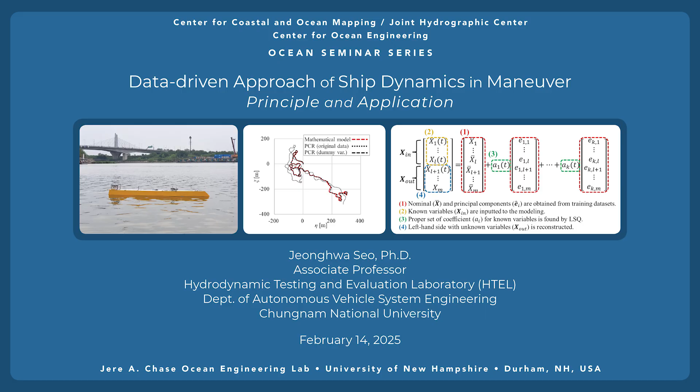So we have an excellent guest speaker today, Professor Jeonghwa. So he is actually going to be here this entire year until December-ish? January? Okay, so he's here at UNH. He's a visiting scientist.

His background: he completed his Ph.D. in naval architecture and ocean engineering, something very relevant to most of us here, in 2016 at Seoul National University in Korea. He did a lot of cool experimental fluid mechanics work then, which we're hoping he will get to do some again while he's here.

He was a postdoc for 2 years and then joined the Department of Naval Architecture and Ocean Engineering at Chungnam National University, which has since been renamed to the Department of Autonomous Vehicle System Engineering. And his research focuses on the design and analysis of towing tank models in naval tests and analyzing operational data with real fleets. So as you're watching his talk, think about the fact that we have this great well of knowledge who will be here for a year.

And again, thank you for giving this talk. We also ambushed him midweek this week and said, would you be willing to give a talk? So 2 days notice, so we are very, very appreciative, very happy to have him here. So take it away. Okay.

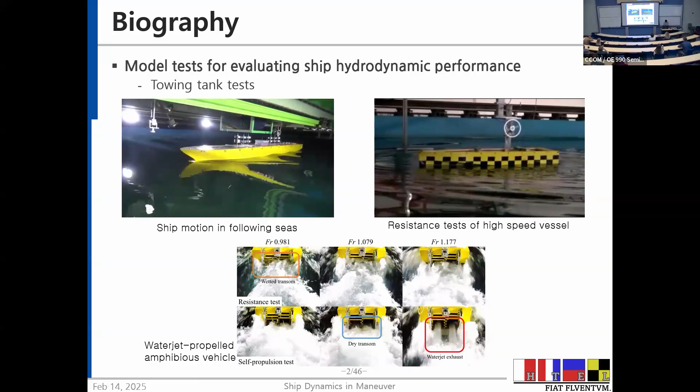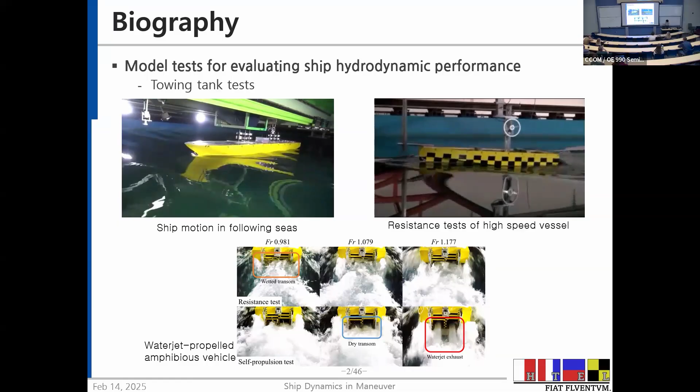Okay. So after towing tank experiments, I focused on flow visualization tests. So all the figures are experimentally acquired, not CFD. Stereo PIV measurement of the propeller wake field, and the wave height field was measured by depth camera around one cylinder in regular waves. And this is my PhD thesis. Here's one body.

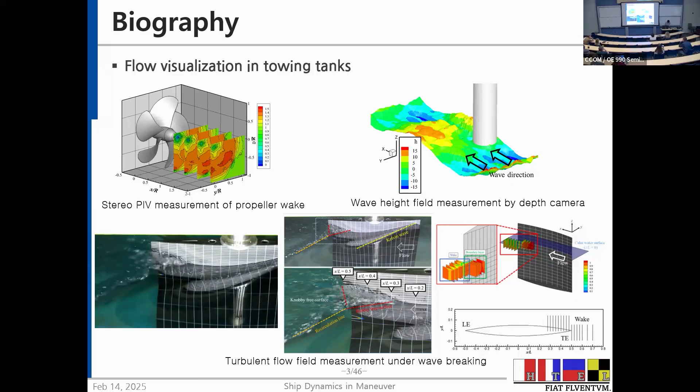And there's one wave pattern and wave breaking. So I measured the flow structure behind, underneath the wave break region by stereo PIV system and made some turbulence structure analysis like that.

And after that, when I moved to my present university, there's no towing tank, so I needed to find another place for experiments. It was outdoor condition, so we made some test models. We call them free-running models, so we can radio control them or make some autonomous operation. So this is an amphibious vehicle model, and this is one surface combatant model.

So we made maneuver tests like this and acquired some data, and I'd like to make some dynamic system from the result. That's what I'm doing now. So I will introduce this kind of thing.

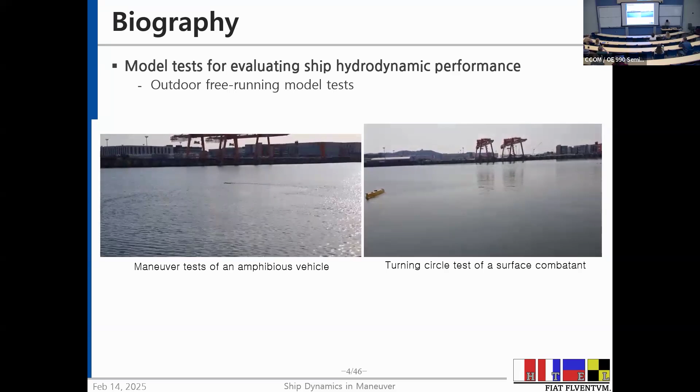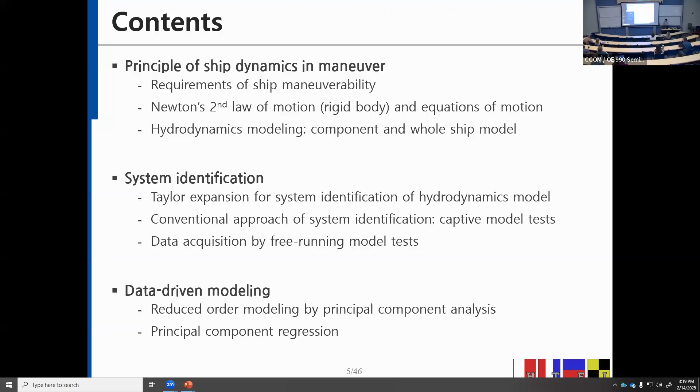Yes, actually this model ship cost about 50,000 as far as I remember, but I got two capsizes of the model ship in this place. It's very expensive and a very horrible experience in my life, because my supervisor got mad. I couldn't evacuate the ship by myself, so I hired one diver to get the model ship back, and I refurbished it, and I did the experiment.

Okay, so for the next 30 minutes, I will make a presentation about principles of ship dynamics in maneuver. Actually, maneuver is somewhat similar to control. So if you are familiar with control theory, then you can find that ship maneuver is a very low level of hydrodynamics or dynamics. And so here are some principles like ship maneuverability and Newton's second law, hydrodynamic modeling.

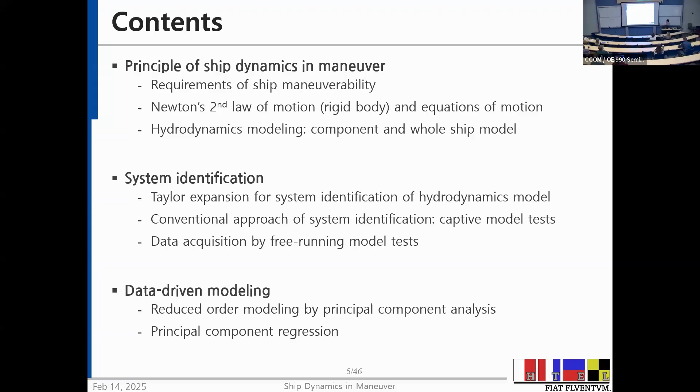And after that, if we got a model, or if we want to get the model, then we need system identification. So conventional and some contemporary ones are presented here, and data-driven modeling based on PCA or PCR is what I am doing now. So I will introduce this kind of thing.

Okay, so most of the audience are in mechanical or ocean engineering, so I can introduce what's going on in naval hydrodynamics or naval architecture, how they think. So the first characteristic is extrapolation. We don't care about the model scale things. We want to know what we cannot know. That means we do model tests and we extrapolate to full scale dynamics or full scale hydrodynamics from model tests.

And we are very conservative, I'm sure of that, and I can say that very proudly, because for all kinds of shipbuilding, the design failure cost is very high. That means even one collision of a ship or one design failure of a ship costs very highly. So we are very conservative, always worrying about new things.

And surely high Reynolds number for our cases, but compared to the field of oceanography or climate, our Reynolds number is relatively very low. Anyway, for me, it's high enough. And ship naval hydrodynamics concerns Froude scaling, focusing on wave-induced problems. Froude number basically deals with gravity-related phenomena. That's why we focus on Froude scaling.

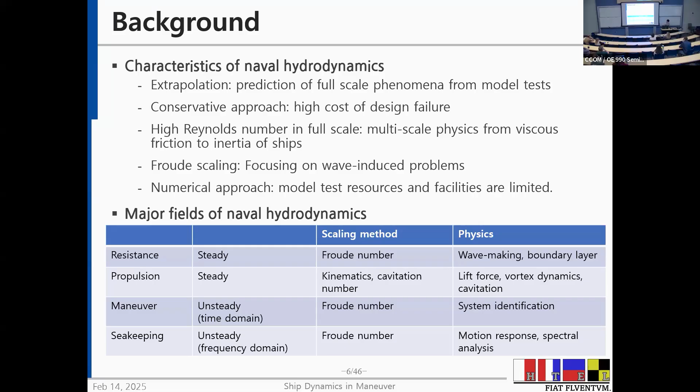So there are some major fields of naval hydrodynamics like resistance, propulsion, maneuver, and seakeeping. These days I am working in maneuver, but actually my major was in resistance. Okay, so based on ship resistance, I will introduce how ship hydrodynamicists think about this problem. So a ship suffers resistance when it's going through the water, and there's viscous resistance and wave-making resistance.

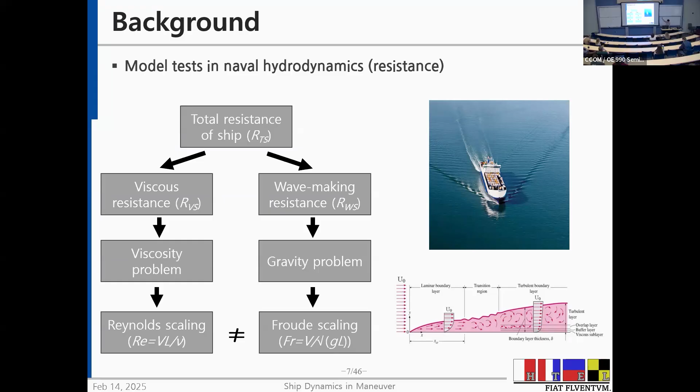Viscous resistance is about the boundary layer friction, so it's about Reynolds number scaling. And wave-making is about gravity, so Froude scaling is required. And if we design a model test, then we can make the Reynolds number and Froude number the same as the full scale ship. That's the basic principle of model testing.

But the problem is we do experiments in water, so the model speed cannot be the same whether we base it on Reynolds number scaling or Froude number scaling. So if we want to make the same Reynolds number as the ship, then the test model speed should be over Mach 1.5. It doesn't make sense.

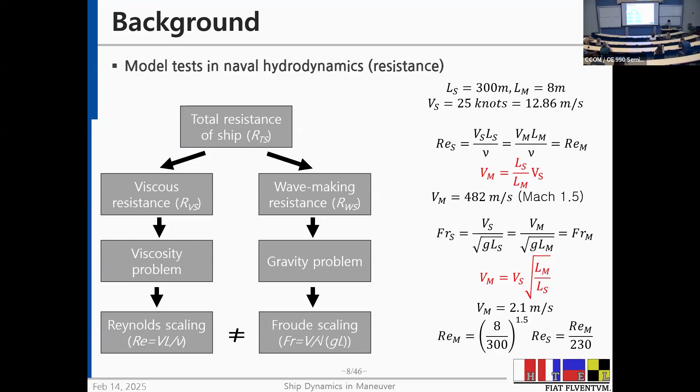So we make the same Froude number, then it's just 2.1 meters per second. Now we are somewhat happy with that. So we do experiments based on Froude number scaling. Surely there are other reasons, but this is the main one: we cannot make Reynolds number similarity in towing tank tests. Anyway, if we get the same Froude number, then Reynolds number is around 100 or 200 to 1, so Reynolds number is seriously reduced in the model scale.

Anyway, for a resistance test, model test, we do the model test at the same Froude number as the ship, and we measure the total resistance of the model ship with one load cell. Then we make the non-dimensionalization, and we need to divide viscous resistance and wave-making resistance. But how?

In 1957, there was one correlation line for Reynolds number and resistance coefficient for viscous resistance. Using this formula, we can compute this, and the rest is regarded as the wave-making resistance coefficient, which is a function of Froude number. So we can say this will be the same between model and full-scale ship. Then we can recalculate the viscous resistance coefficient at the ship's Reynolds number, and add them together to get the resistance of the ship.

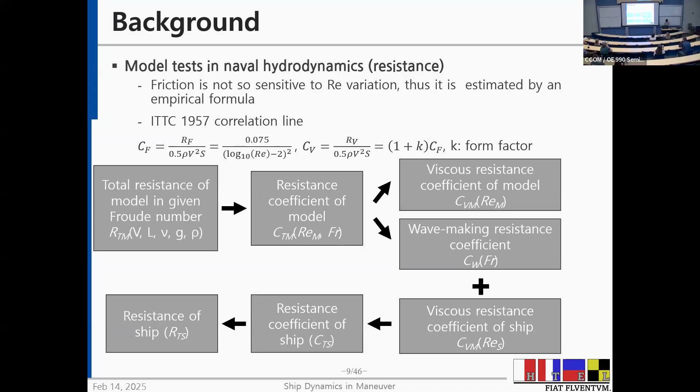So basically, we do the experiment based on Froude number, but there's a difference in Reynolds number. Fortunately, friction is not so sensitive to Reynolds number variation, so we just use these kinds of empirical formulas to treat the Reynolds number difference between model and ship. It's very common in naval hydrodynamics.

There are towing tanks around the world, and the towing tank community has made standardization or recommended guidelines for model tests, because this is a very conservative field. Everyone wants accurate experiments and accurate analysis, so there's no room for innovation, I think -- though I'm young in this field as well.

Anyway, ITTC usually holds their conference every 3 years. In the US, as far as I remember, University of Iowa and University of Michigan are members of ITTC because they have towing tanks similar to this one. But anyway, they are naval architects, so the naval architecture community runs this kind of thing.

Very long introduction, but now I will talk about ship maneuverability. Basically, ship maneuver is achieved by rudder control. The rudder is usually located at the end of the ship, which we call the stern. The stern propeller's accelerated flow makes flow go through the rudder to create additional lift force.

You may know about the steering wheel of very old ships -- it actually works like this. You turn the wheel, and then a lever, which we call a tiller, is moved to make the rudder deflect. It's all the same even in modern ships, just with a hydraulic system to turn the rudder so you can turn the ship.

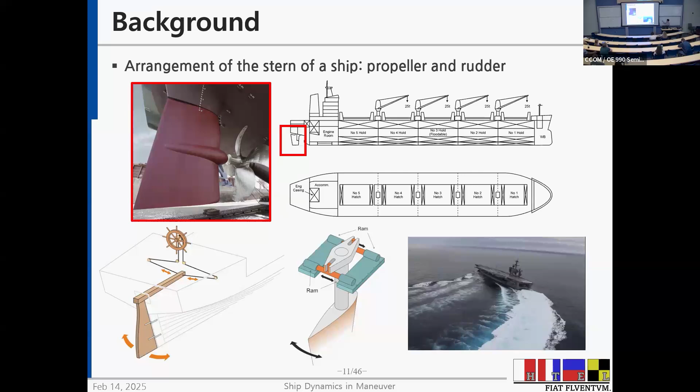This is a more detailed explanation of ship dynamics during maneuver. As I said, we control the rudder to maneuver the ship, but the rudder only initiates the motion. At first, we turn the rudder and the ship starts to move, but when the ship begins to turn or enter yaw motion, the hull itself suffers a Munk moment that maintains the turning. So usually the rudder just initiates, but after that, ship motion is dominated by the hull itself, not the rudder. Sometimes when the ship is turning, we deflect the rudder again, but it never responds because the ship's dynamics is already dominated by the hull.

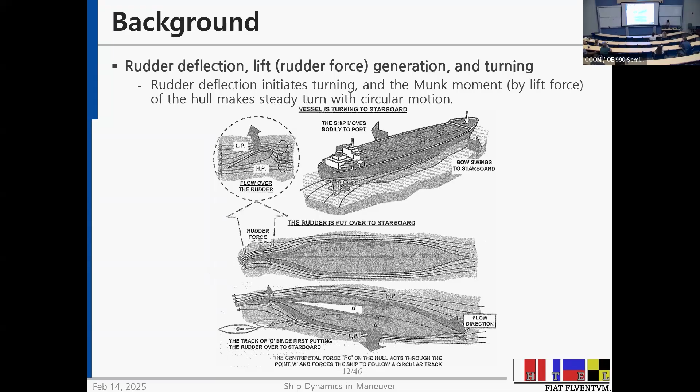For ship design, the ship needs to be stable enough to keep its course against external disturbance -- that's the main requirement for shipbuilders, called course-keeping ability. In addition, the ship should be unstable enough to change course easily with rudder control, meaning it should change heading easily when wanted, but go straight when not. These are conflicting requirements. To deal with them, we need a larger rudder.

If the rudder is large, we can satisfy both requirements. But ship owners don't like that because it increases the building cost of the ship, and sometimes causes additional drag or difficulties in stern arrangement. So for naval architects, designing the rudder is always a kind of conflict and compromise.

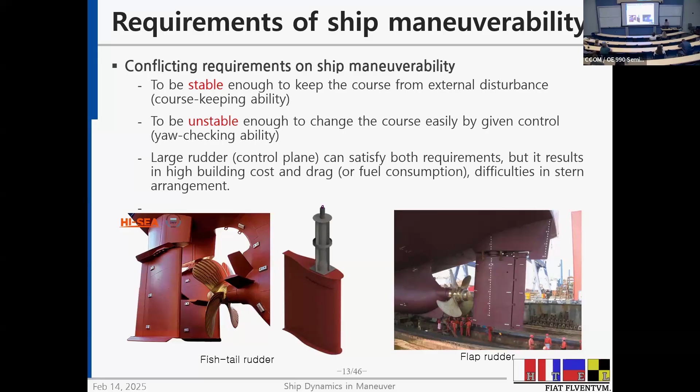Ship maneuverability is important. IMO, the International Maritime Organization, rules criteria of ship maneuverability. So if you make a registered ship, you need to do a maneuverability test after you build the ship and before registering it. It should pass the maneuverability exam for criteria.

There are some tests like turning circle test, just making a circular turn, and zigzag test. These two are very important. And if the ship has some difficulties in hysteresis at small yaw rate, then we do an additional spiral test like this, making a big turn with rudder deflection getting larger and larger to make some spiral.

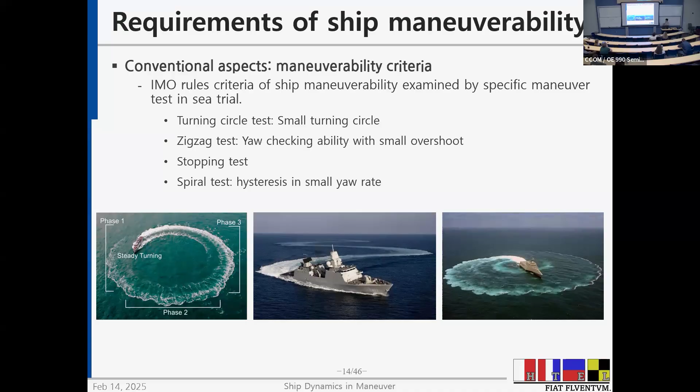But ship maneuverability is tested after the ship is made, and ships cost very high, so we need to predict it at the design stage. Ship maneuverability must be accurately predicted before sea trial. If the ship is in sea trial and it's proven that it does not satisfy these criteria, then ship owners may refuse the ship to be delivered, which is a total loss for the shipbuilders. So shipbuilders like to predict all the maneuverability even before the ship exists.

But full-scale experiment or full-scale CFD is practically impossible. Some may try, but because of high Reynolds number, we need to know about the viscous friction of the ship, so it's a very wide multi-scale problem. It's practically impossible in the very urgent ship designing process. Sometimes we need 2 or 3 weeks for getting hydrodynamic performance, but full-scale CFD may not meet the requirements.

Extrapolation from model tests is common, and prediction of time history of the ship is usually needed. So we do maneuver simulation using ship hydrodynamics modeling. That's what we do.

To explain maneuver simulation briefly, we use the equation of motion, F equals ma. If we have a hydrodynamic force model, it's just the estimation of force onto the ship based on current status like speed or rudder angle. Then we can estimate the force, and by integrating the force and resultant acceleration, we can make the time history and predict the time history of the ship. So this is ship maneuver simulation for us, and my task is to develop the hydrodynamic force model, because I cannot change the equation of motion. Maneuver simulation is done with the same methodology across researchers.

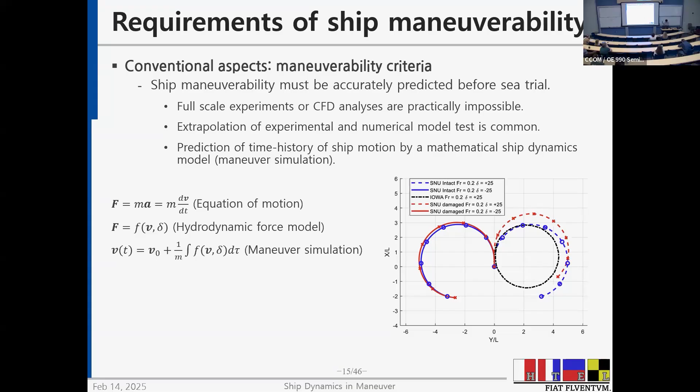So hydrodynamic force model is my main concern, and it was a conventional aspect. Usually naval architects focused on IMO criteria, and after that, nobody cares about it. Those very well-trained and experienced captains steer the ship, so it's all his responsibility. Once the ship passes IMO criteria, then nobody cares about the ship's maneuverability.

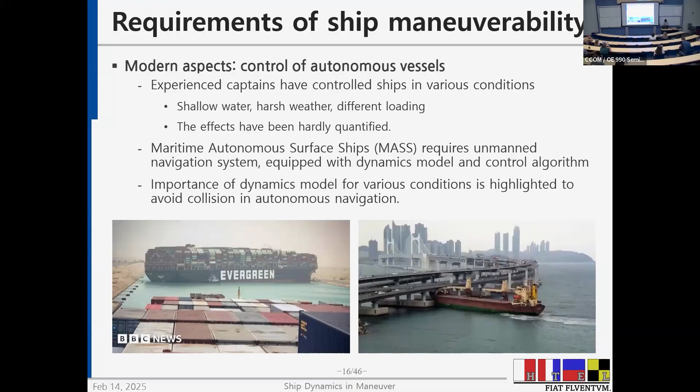But the world has changed for autonomous vessels, and an autonomous vessel steers by itself usually, getting its route and making rudder deflection to keep the route. But the ship hydrodynamics model should be very accurate and needs to reflect all kinds of external disturbances. Even very well-trained or very experienced captains make mistakes like this in maneuvering. But what happens if we make them autonomous? We are sure more collisions and accidents will occur temporarily. So better hydrodynamics modeling can predict these kinds of accidents and help make a better maritime world, I think.

Okay, long introduction again. I have just 50 more minutes, and I have 30 slides. Okay, I need to hurry. I'm getting tired.

So the objective of ship maneuverability is just prediction from model test. That's all. Let's keep that in mind.

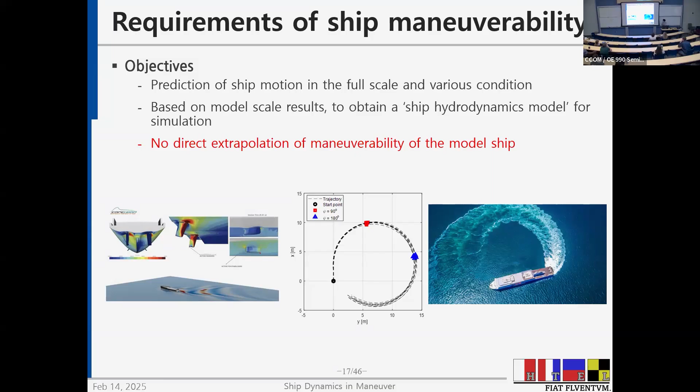You may know that there are 6 degrees of freedom, but for ship maneuver, we use 3 degrees of freedom motion on the water surface: surge, sway, yaw have been treated, but recently people like to include roll motion, because roll changes somewhat the yaw characteristic of the ship.

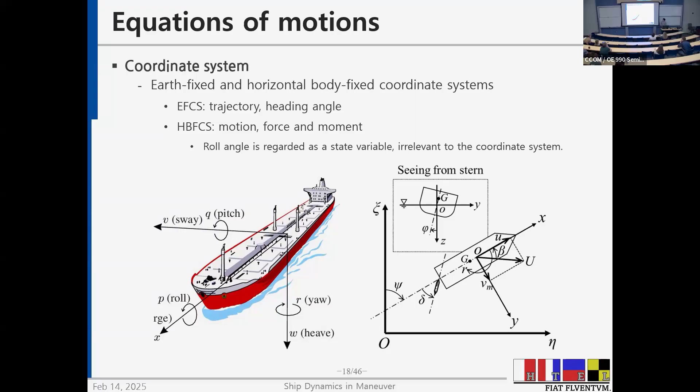We use 2 coordinate systems: Earth fixed, and horizontal body fixed, which is fixed on the water surface. So even if the ship has roll motion, the body fixed coordinate never tilts with it. We keep the body fixed coordinate system parallel to the water surface like this. So ship roll angle is just a kind of state variable, but it is irrelevant to the coordinate system change. That's a very important thing for ship hydrodynamics on the water surface.

And we have equations of motion. I will skip it. We need this left-hand side term for force and moment, and we need to model it. But there are three kinds of force: one proportional to acceleration, one about steady motion, and a hydrostatic one.

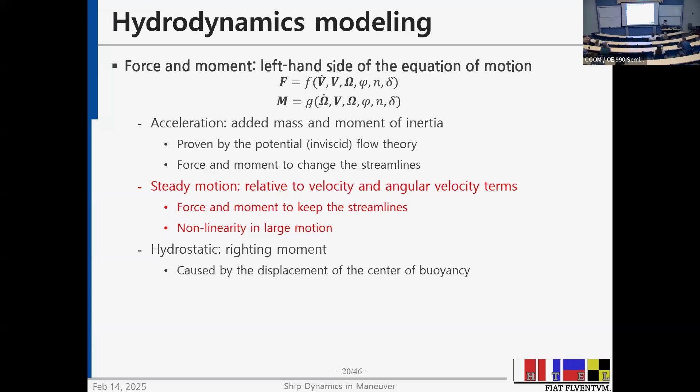Yes, and then we do hydrodynamic maneuver simulation with the model, but we got modeling for scaled model, and we want to extrapolate to full scale. Using simulation, we can get time series of trajectory and motion of the full scale ship to figure out whether the ship satisfies IMO criteria or not.

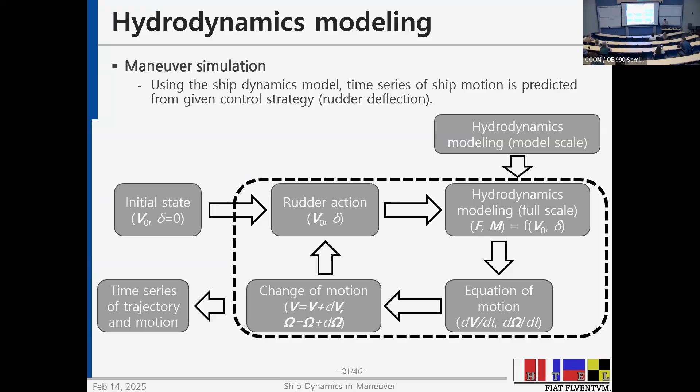That's it. And there's some very classical fluid dynamics theory of added mass. Usually it's very important for us in a very conservative way. So I think it's an undergraduate course for Rankine ovoid and potential flow, something like that, in steady condition, steady flow.

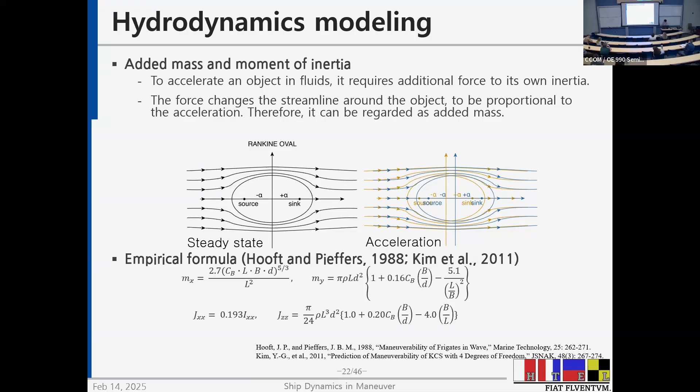Anyway, there's some empirical formula for ship's added mass or added inertia, added second moment of inertia, for estimation for ship hydrodynamics. Hydrostatics is also important for ship, usually used as righting moment. So even if the ship heels, then the ship stands again by the righting moment. It is called righting moment, and ship's weight and GZ is our characteristic length of the righting arm.

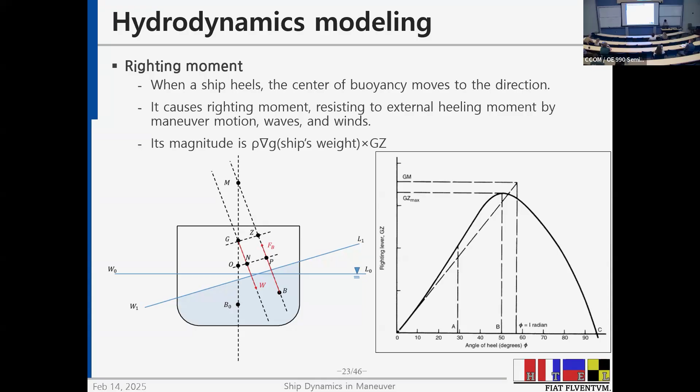So that is hydrostatics, and the rest of the objective of system identification is usually finding steady motion. Force and moment onto the ship is a function of linear velocity, angular velocity, ship's roll angle, heel angle, propeller revolution rate, and rudder deflection angle. So we need to make the modeling of these inputs and put this output.

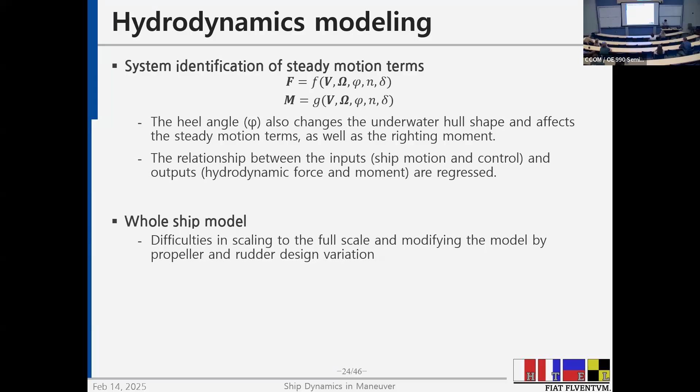Some decades ago, there was a whole ship model, so we need to find 5 input variables for 2 output variables. We need to model like that. But in the 1980s, a Japanese research group suggested that we can divide the propeller and rudder model. It's a physics-based model, so they are just calculated from its dimension or geometry.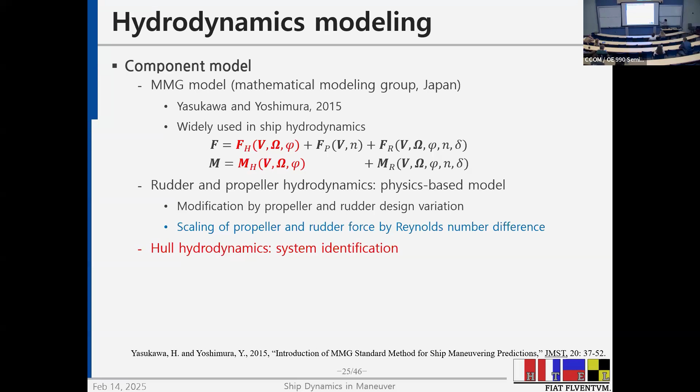And then hull force is the only objective of system identification, so we can make a simpler approach for system ID. In these days, all the shipbuilders or naval architects use this kind of approach, the so-called component model, and more specifically, the MMG model has been used.

So the problem is how to define or how to structure this model. Usually Taylor expansion is used for system identification. We need to find all the coefficients to complete these kinds of models. Then how can we determine all the coefficients?

In conventional ways, we do captive model tests, and some new methods are suggested by people like me, but it's a very conservative field, so it's just on paper. No industries use these new approaches. They just do captive model tests, as they have for 40 years.

So the captive model test is a kind of system identification, but we can force the ship to move in an exact designed way. We can make static drift, or circular motion, or some other motions, and we measure the force onto the ship during the ship's designed motion. So as the ship is in this motion, we can measure the force onto the ship to complete the model.

It's a very conventional way, but it requires lots of towing carriage runs. That means 1 or 2 days of experiment, but usually commercial towing tank schedules are very busy. They arrange tests for resistance, seakeeping, maneuvering, and so on. So more experiments, more towing carriage runs, is not so helpful for them.

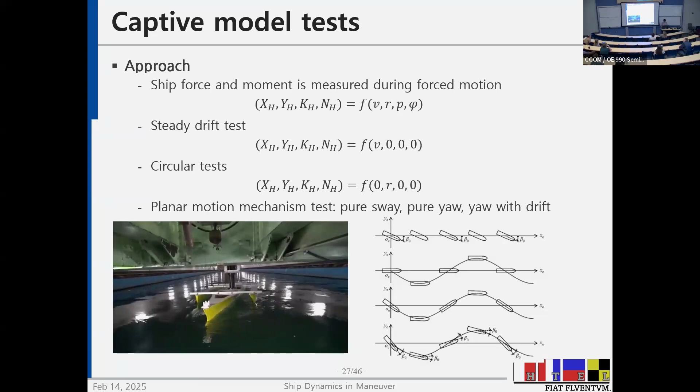So just based on these crucial things, we need a model to predict these kinds of motion. So it may be difficult, or sometimes not accurate enough. That's the problem of captive model tests.

So some people suggested that we can run free-running model tests and then get data for hydrodynamics modeling. But the problem is, if we do a free-running model test, then we cannot measure the force directly since it's moving. But we can get kinematic things like motion or trajectory.

So these kinds of force and moment is very important, but it is just some kind of intermediate variable for the system ID. That's the problem. But anyway, people tried Kalman filter 45 years ago, and still 10 years ago we did Kalman filter, and very recently, my MS students and I did some optimization of coefficients based on this kind of approach.

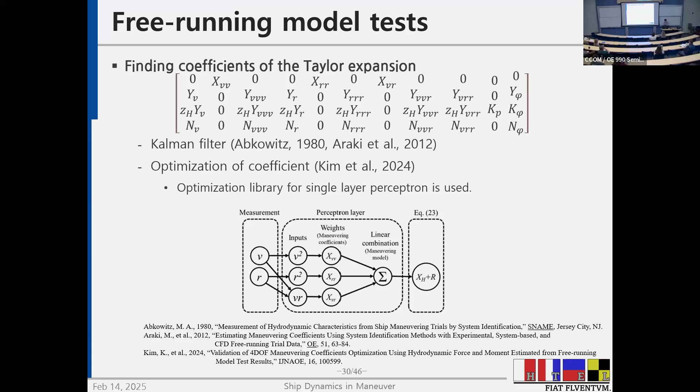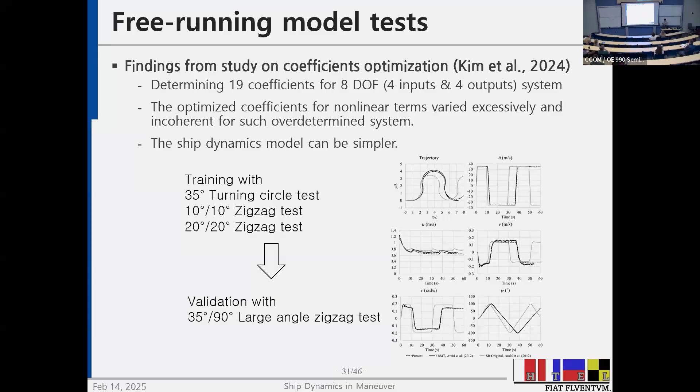Anyway, so we did some optimization, and we found that 19 coefficients for system ID is too much for a 8 degree of freedom input-output system. So the ship dynamics model can be simpler if we try to reduce the number of required coefficients for system ID, and then we can design the model test in a more concise way.

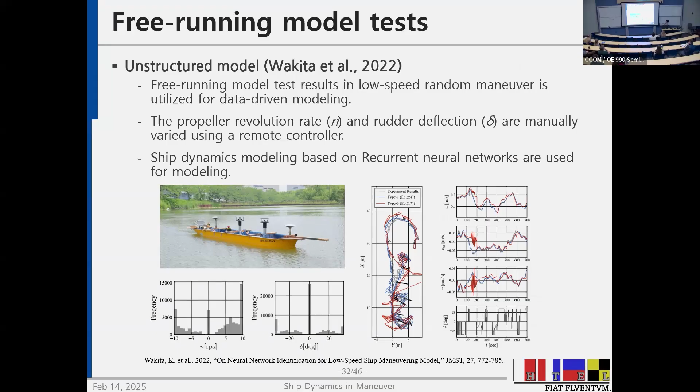Similar research was done at Osaka University. They do free-running model tests in low speed maneuvers in a very random way. They call it random maneuver, but actually it was done manually in a random way with one radio controller. Anyway, they insisted that it was good. So I'm happy to find that others are doing similar things. Okay, and then there's still one more question.

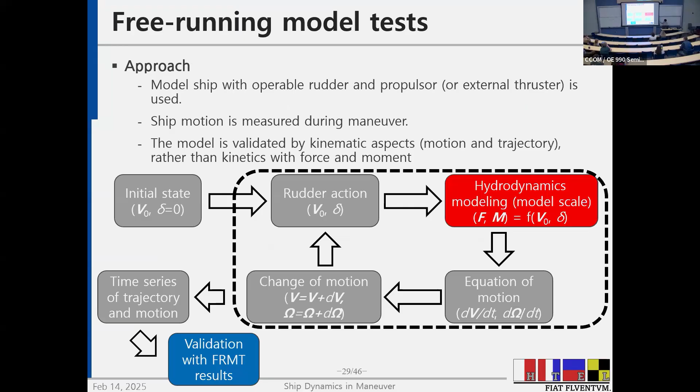The system ID based on free-running model test uses kinematics, and the force and moment should be the final variable, but in this method, it is just an intermediate one. So can we estimate the force and moment acting on the hull during a free-running model test? The answer is yes, it's very positive, because we know acceleration, and if we multiply by mass and added mass, then it should be the force acting on the ship.

But it's not so common in my field because it's so conservative. Okay, so anyway, we tried that. Someone else also tried that, but it was not regularly used for ITTC. Based on the equation of motion, we know ship acceleration and velocity, and mass and added mass. Then propeller and rudder force should be known, and then we can get the hull force component.

So propeller and rudder force can be directly measured during a free-running model test by attaching load cells on the appendages, or estimated by validated CFD analysis, or an existing MMG model is also good for estimation. And then we can get hull force and hull moment during the free-running model test.

This is one ongoing project. Basically, it was supported by the Office of Naval Research Global for the US Navy, but the project is done, and still we are working on the ship to make better improvements of the design.

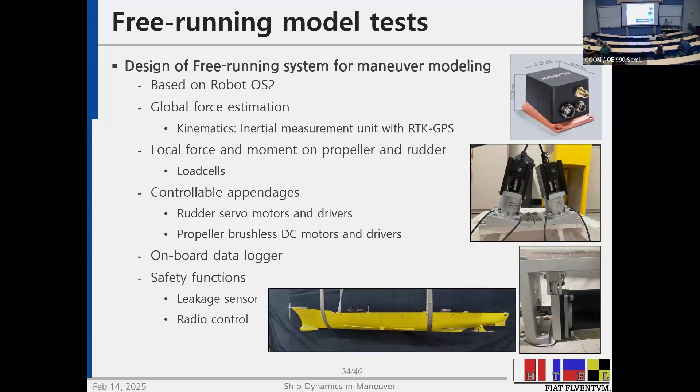So ROS2 is the operating system for this model ship, and we can estimate the global force of the whole ship based on RTK GPS and an inertial measurement unit, and rudder and propeller force is measured by load cells, and we need some control appendages, an onboard data logger, and safety functions so the ship doesn't capsize. This model ship is built in my laboratory, and we bring it outdoors to do maneuver tests, and we can make the hydrodynamics model of the hull. That's what we are doing.

And there's one topic. This is the last topic, and we have 10 slides. We have only 1 minute? Okay, so you have 5 minutes. Thank you very much. 5 to 10 minutes, yeah. Okay, 5 minutes is enough.

So these days, I am focusing on principal component analysis. It's a very old concept. But we found that ship dynamics is highly coupled and non-linear, but it's not discontinuous or so complicated, I think. So with small non-linearity and highly coupled motion, we can use PCA for understanding what's going on. PCA is a kind of gray box approach, I think. Not physical and not fully data driven.

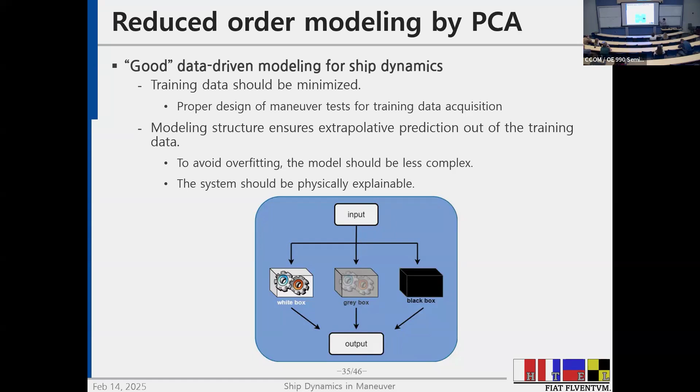So at least we can explain it, and by explaining, we make sure that it will work outside of the training data. That's very important for ship dynamics. In my field, I mean turbulent fluid dynamics, PCA has been known as proper orthogonal decomposition. And on Tuesday, Tom told me EOF is also a common name for PCA. So it's a very old technique, and everyone uses this kind of technique in their own way.

The principle is you have some data like this, scattered like that, but you can rearrange the coordinate system or axis to explain this data well in this way. But it's wrong, because we can adjust the mean or nominal point to the origin and make these kinds of transformation, and with just one axis, we can explain the data, approximate the data.

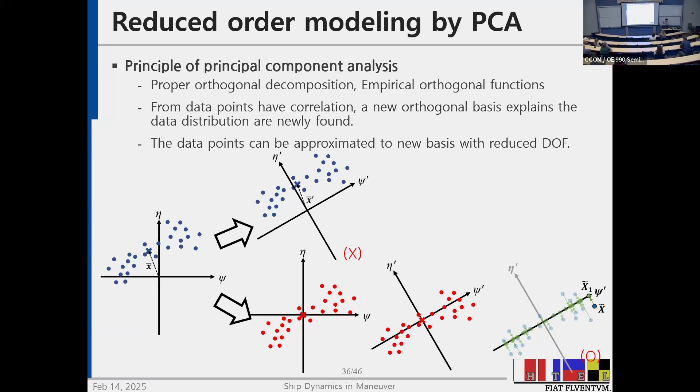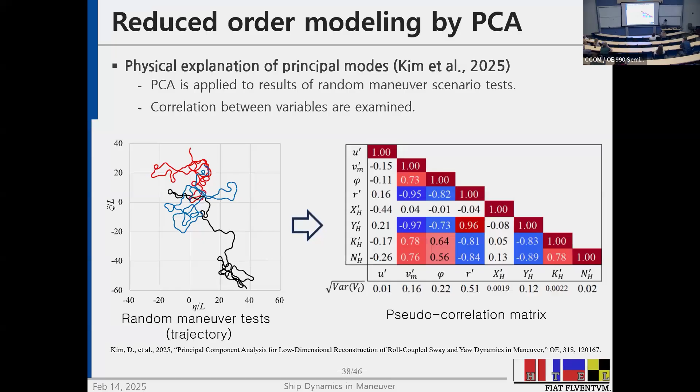That is PCA. So ship dynamics is 8 degrees of freedom, I mean an 8 variable problem, but they are highly coupled. So we can use a smaller number of axes to explain ship dynamics if we do PCA. This is just a mathematical thing, so I will skip it. So what we are doing is doing some random maneuver test of ship. And then we got cross correlation and we got eigenvectors.

This is a 6 degree of freedom motion problem at the initial stage. But anyway, we need four eigenvectors. I mean, the degree of freedom can be reduced into 4 from 6. And then we can explain 90% of the physics with a reduced number of eigenvectors. So it's good. And then we expand it into principal component regression.

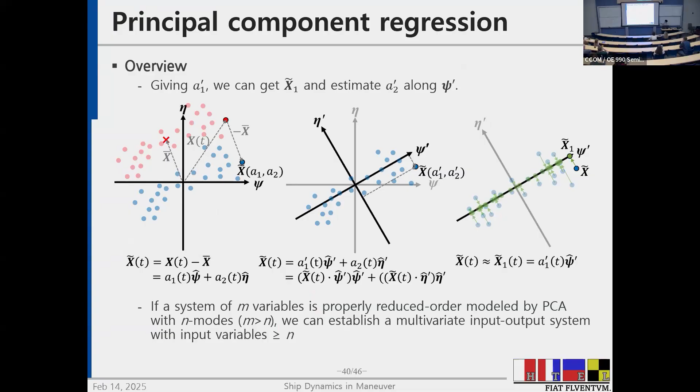Regression is: we have 4 eigenvectors to explain the system, and then usually the data of ship motion we have is 3 variables, or sometimes 3 or 4. Then we can estimate the rest of them based on the coupled phenomenon or coupled physics explained by PCA. So back to the PCA, if we know x1, then we can also estimate x2 based on these transformed axes. These are our results.

And then the PCR-based hydrodynamics model has a very strong point that it can predict or extrapolate out of the training data sets. Once we fully understand the physics, then it suggests a good axis for extrapolation. So usually we do tests, zigzag and turning circle test. Red and black ones are conventional model tests for free-running test. But ship dynamics has been found in wider regions, the gray one, I mean.

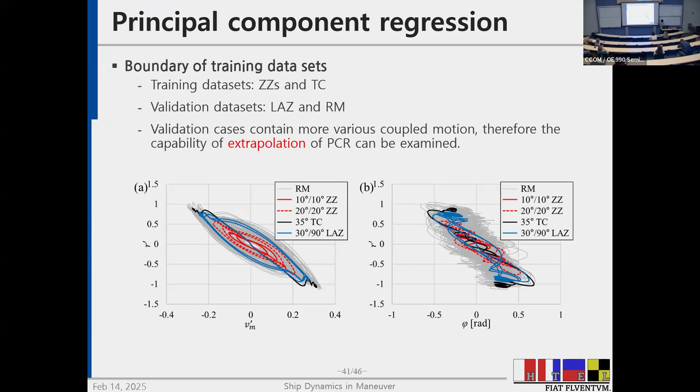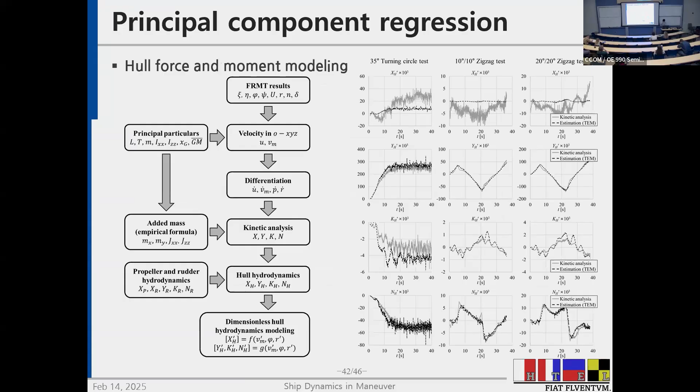So our task is, based on this red curve or sometimes adding the black one, we need to predict or extrapolate the hydrodynamics of all the gray regions. But PCR works well, so we are happy with that. Okay, so we estimate hull force and moments from free-running model test, and the plain PCR sometimes doesn't work. So we introduce dummy variables.

You can find that these are original variables, but we added 2 more variables, just a combination of existing input variables. And then we can find that it can weight more to the initial eigenvectors. So in this case, we have 7 variables, but we know 4 variables. We need to find the 3. Then we can utilize 4 eigenvectors only. But still, there's some important eigenvector that we cannot utilize for PCR.

But adding some dummy variables, now we know 4 and 2 more variables as dummy. So there's 6 variables that we know, and we need to find 3. Then we can utilize 6 eigenvectors for PCR. So here the rest of them are not so important, then we can fully utilize all the important eigenvectors for system ID.

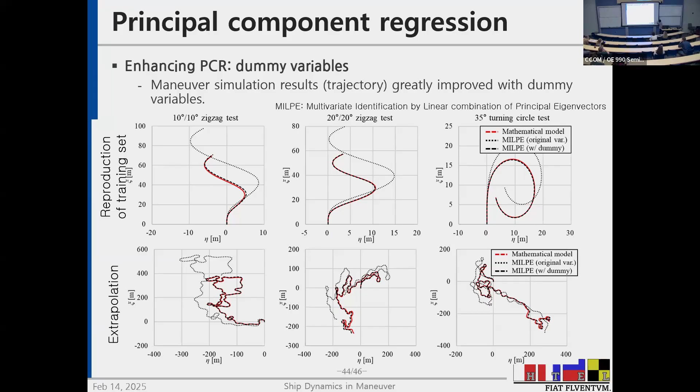Using that kind of dummy variable thing, we have compared the original variables and dummy variables. And the dummy variables hydrodynamic model agrees with the original training data set for reproduction, and also it very accurately predicts the trajectory of random maneuver cases. So in my laboratory, we like to call it MILPE, multivariate identification or something like that. It contains dummy variables and some nominal state description for ship hydrodynamics.

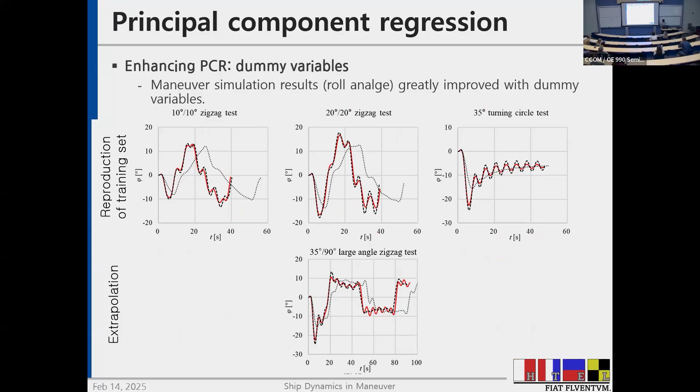And also it predicts roll motion quite well. So the conclusion is I'm happy with it.

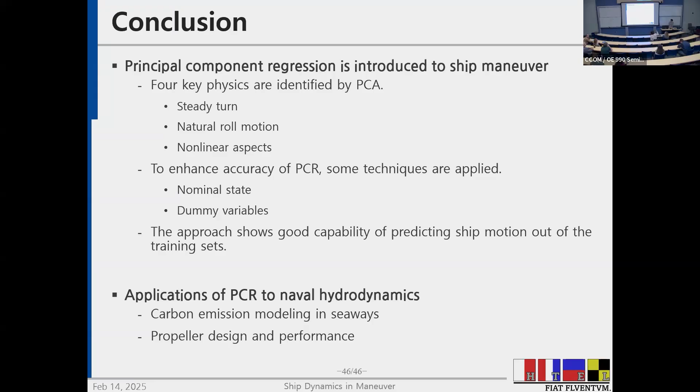Oh, I have a question. The dummy variables that you used in the PCA, did you just do a combination of some of the variables you had? Did you test out different combinations to see which one had a better component? Yes. Right. So till now, finding the best dummy variable is the main task for us,

but it's a very labor-intensive way. Not me, my students, all trying combinations to find the better one. Till now, these are better, but I think there's some good way to find the best combination of dummy variables, numerically or mathematically, but we still want to find them.

Is that enough? Yeah, because there are methods where, instead of projecting them onto available variables, you just project the space, and then you find the variables after the fact. So you don't really worry about the individual variables, more of a combination of them at the end, if that makes sense. Your axes aren't going to be on your variables. I cannot visualize them, but anyway, in a very high dimension, they are all. You're right. That's cool. Okay. Thank you.

I think you're the first one who tries it, right? I was wondering if you had to add or consider another variable, like if you were on a really small scale and you had to consider surface tension or something, would that mean you would need more dummy variables? Or would that sort of replace all of them?

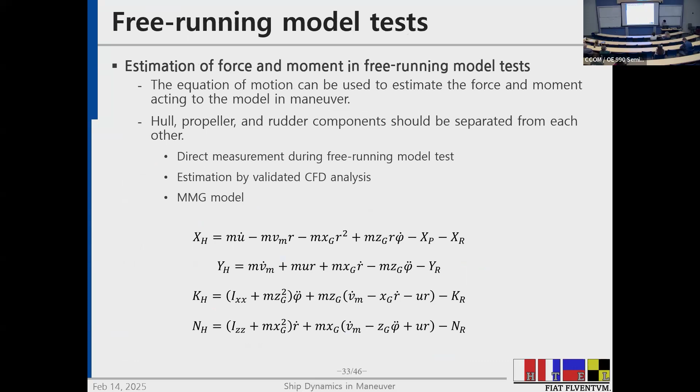Yes, thank you for your presentation. I'm wondering about nonlinear behavior between the forcing conditions and the response of the vehicles. How much do you worry about that? You mentioned that there was not much nonlinearity. You mean the comparison of captive model test and real motion, or? That's part of it, yes, absolutely. How much does your forcing, which can be very nonlinear, interact with your dynamical response? Can you reach states that become unstable for the vessel itself, and does that need to be fed back into the design of the vessel? It's clear.

Regarding the nonlinearity of the ship dynamics, actually we have no exact idea how nonlinear it is. That's why we're still using Taylor expansion. But it has been proven that it works well. It's not academic words, but in the industry field, they are happy with that. That's why we have been using this for 40 years or longer. So we are still working to find some nonlinearity or differences based on free-running model tests. That's why we do free-running model tests.

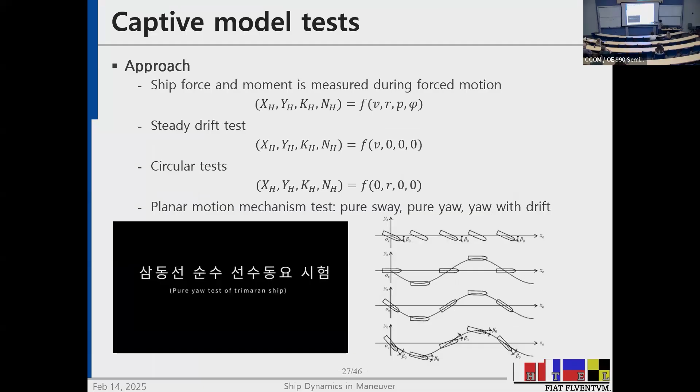These kinds of experiments or activities are to predict the ship for the IMO test. Once it passes the IMO test, nobody cares about maneuvering in a very rough or brutal way. That's true in the industry. So yes, that's why we are still using that. Right, thank you.

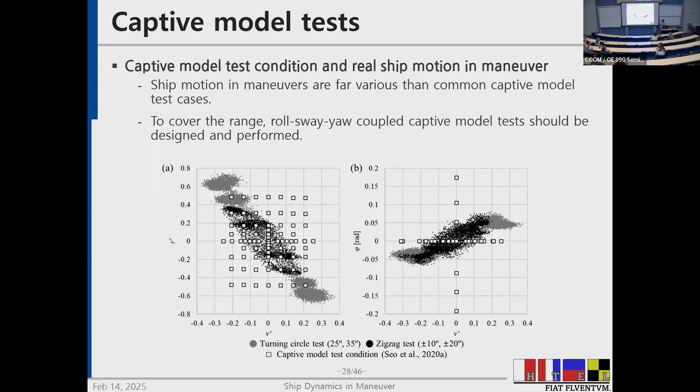Maybe I don't understand the details, but the dummy variables that you included in the end, does that imply that there's a portion of the hydrodynamics that you haven't captured in the original physics-based model that is being captured by those dummy variables? And does it give you a hint as to what is going on that's not captured in the hydrodynamic model?

Yeah, it's a very good comment, because we want to find some dummy variable that contains very important coupled dynamics that have never been attempted in the Taylor series expansion. So by seeing these eigenvectors and their contributions, we may find that some variable has a 90% contribution for both eigenvectors, and it may give some physical explanation of the system. We still want to find what is going on based on that. So this is a kind of research topic. I want to find more about the dummy variables, their physical meaning, and how to find them.